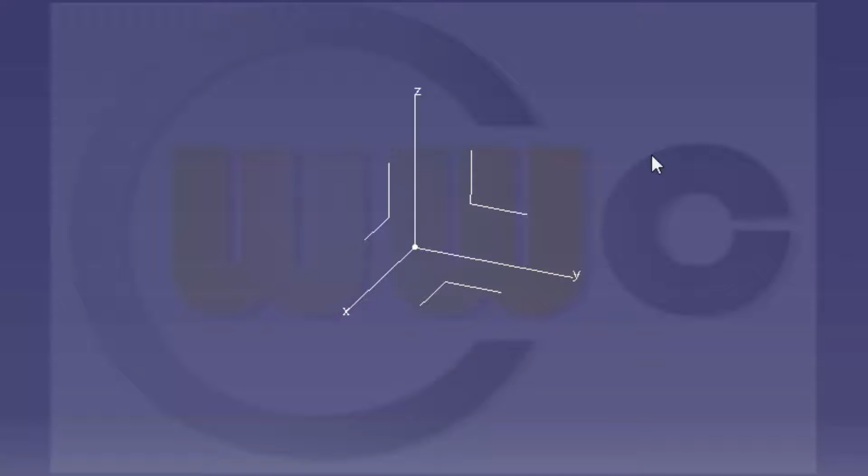Let's start first with some more geometrical sets. Call this one reference planes. Insert another one, call it sketches. And another one, call it surfaces. Okay, first start with the reference planes.

I need some planes which have an offset from this one. First 2.5. Activate it with a double click, then it stays active. This should be reference 10.

Another one from this one, this should be 110. Next one from here, this should be 10 again, and a last one with 17.5.

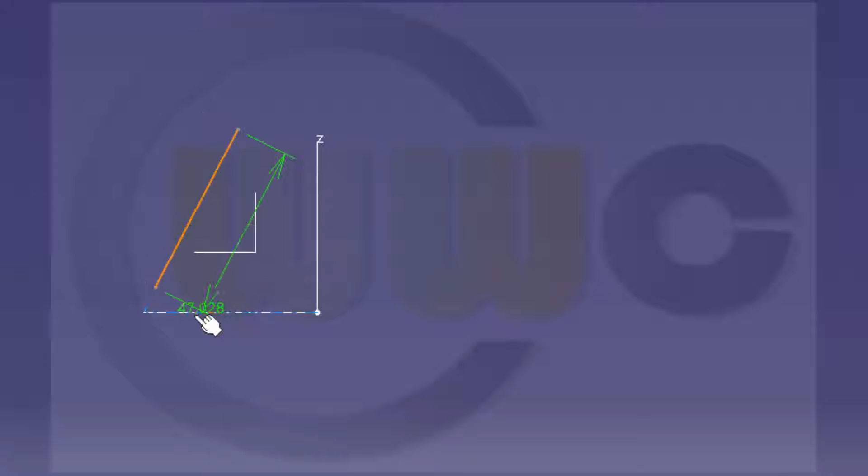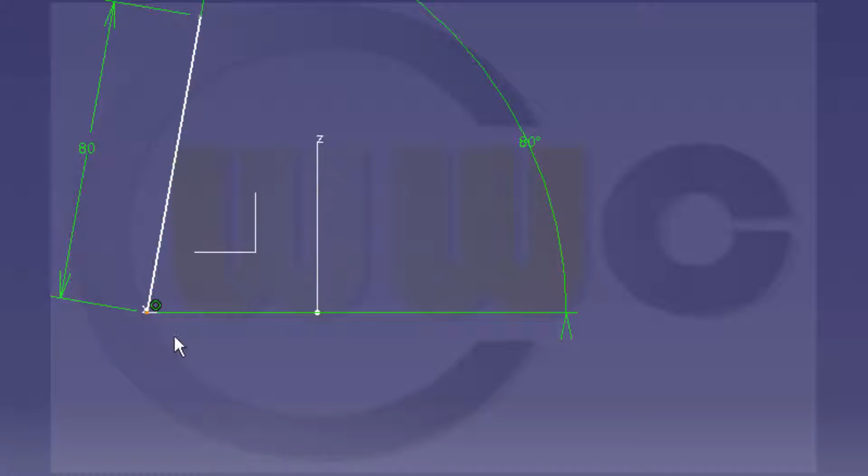There should be an angle, this should be 80. This should be coincident to that axis. This might be 80. And distance from that point to that axis should be 20. Okay.

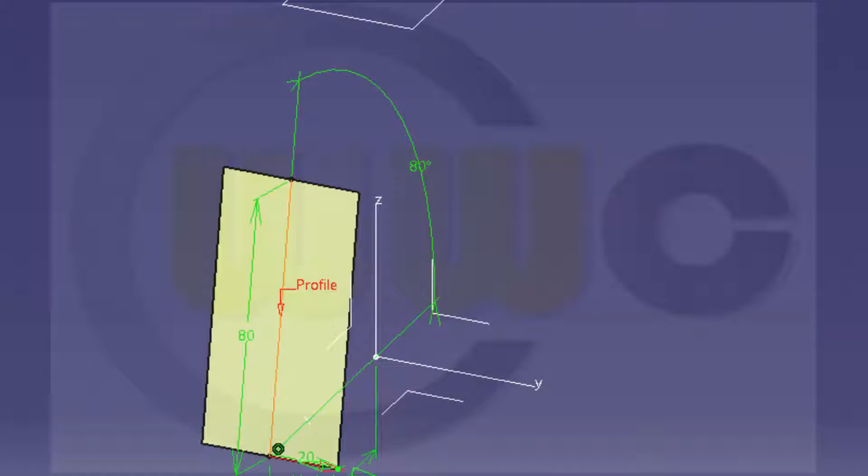Change the geometrical set and make an extrude with this line, make it mirrored, make it 100, then mirror it with that plane and confirm.

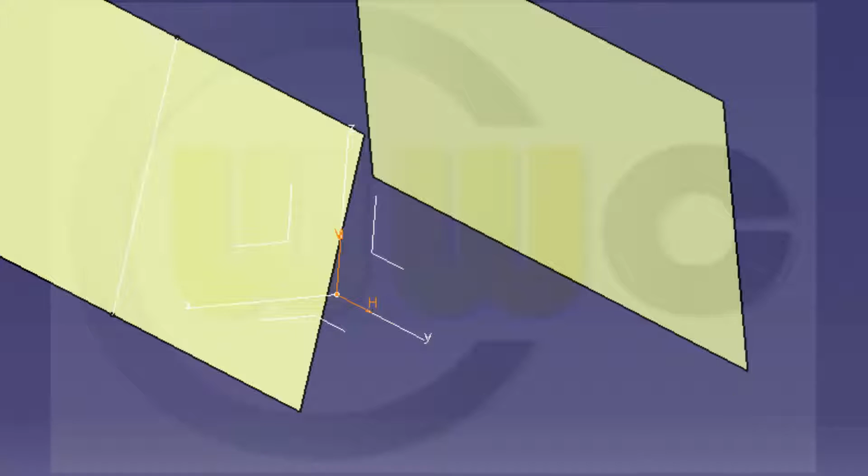Then I need another sketch on this plane. Okay. Hide. And this should be a circle. And that should be 90.

Or let's make an arc, 3-point arc. It should be something like this. Maybe hide this one. Okay. Radius should be 90.

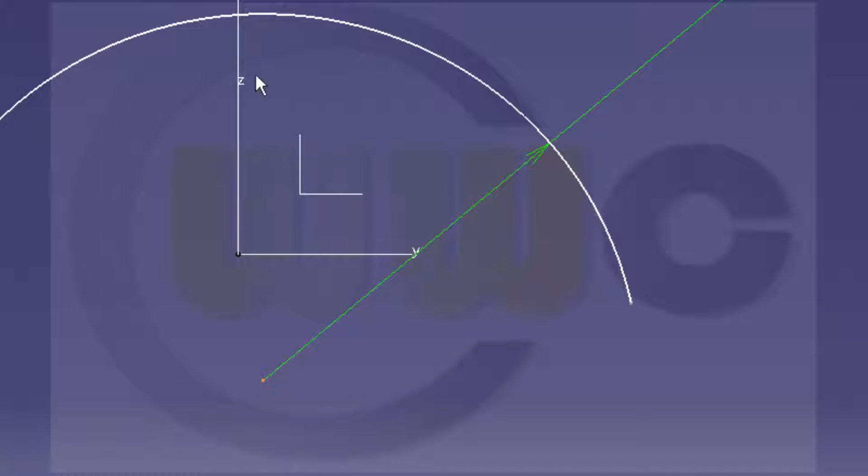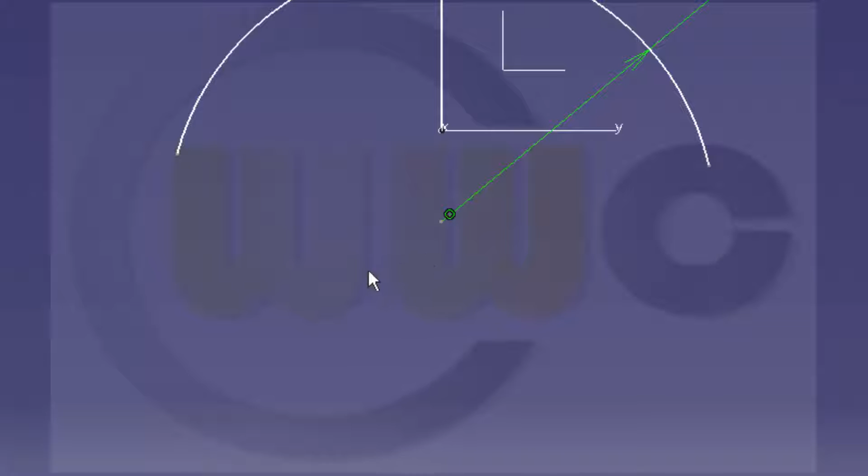Okay, that point should be on that axis, coincident. And maybe this one on that axis, coincident, and the same applies to these points.

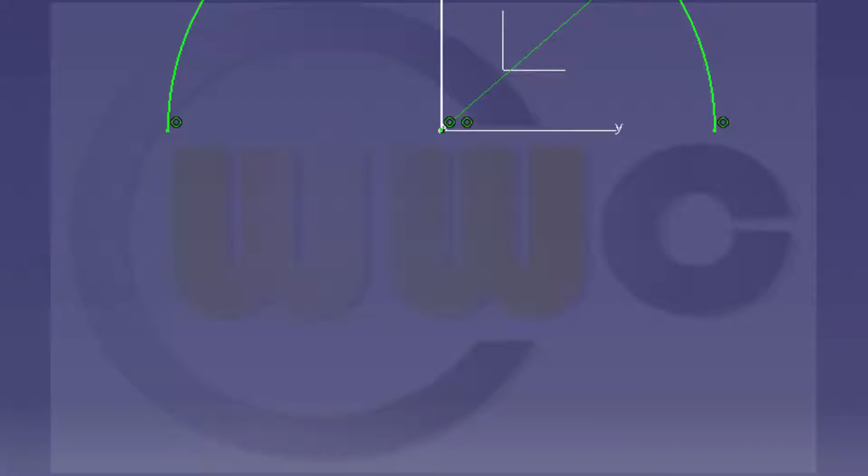Leave the sketch and make an extrusion, at least, yeah, 100 is okay. Fine. And I just noticed this should be a little bit more, let's say 90 or even 100. Okay.

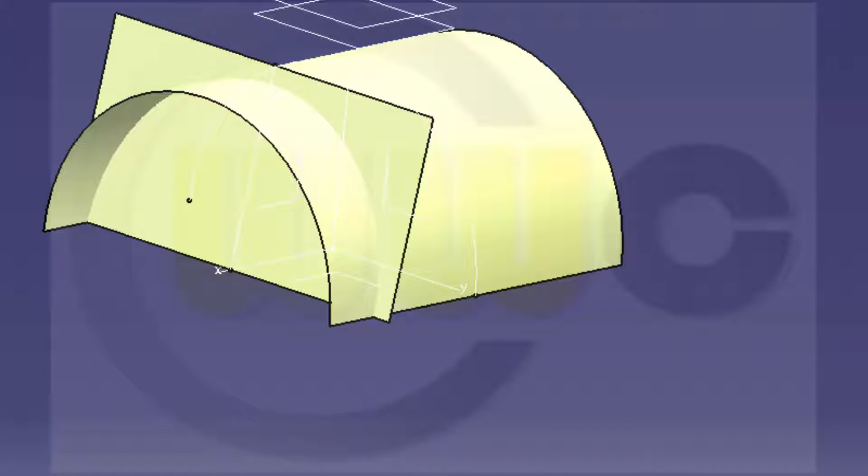This sketch should be in this geometrical set. That's okay. And I need another sketch, another circle.

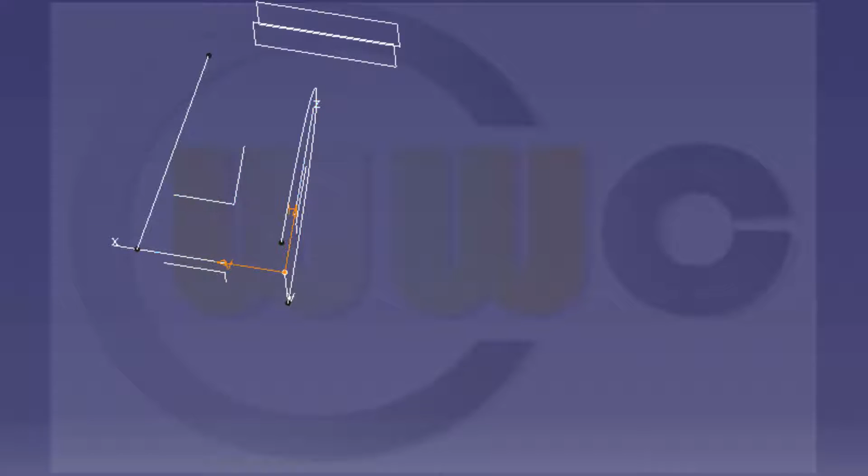Make this the working object. Hide this for the moment. And this should be right on that plane. Swap, reverse, okay, hide, and this is a circle, so I'll go for an arc again.

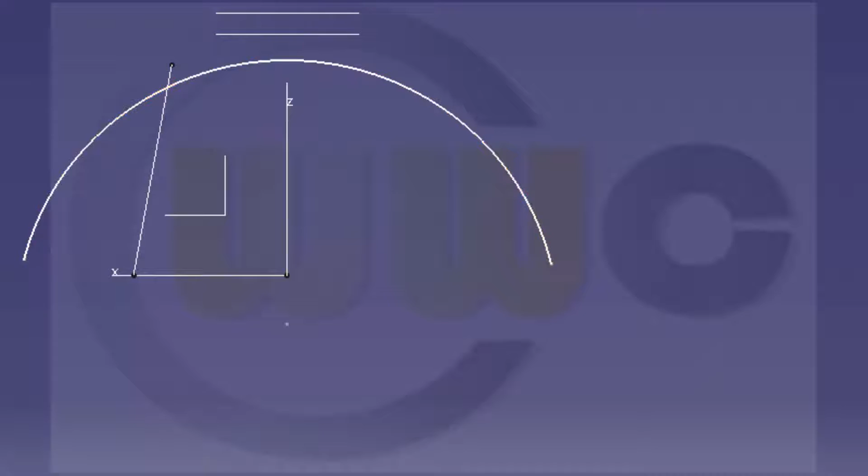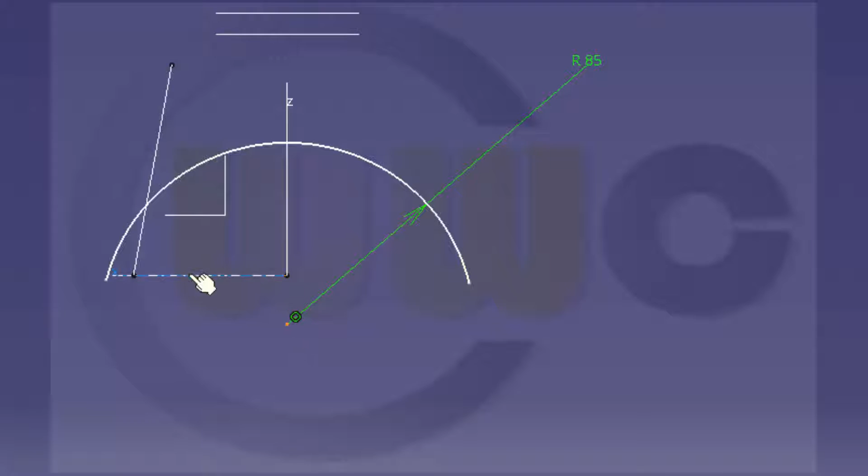1, 2, 3. Radius should be 85. This should be on that axis, and again coincident, and let's make their distance, let's say, yeah, 20 is okay,

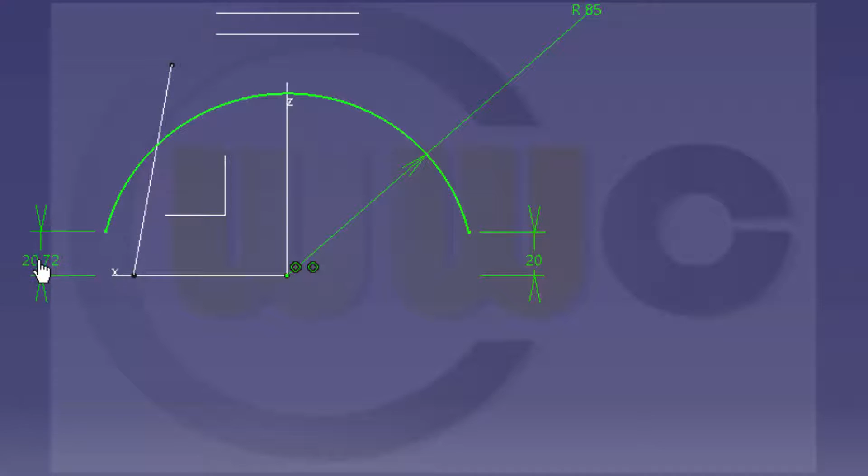and here as well, let's use a constraint, make another extrude, so show this.

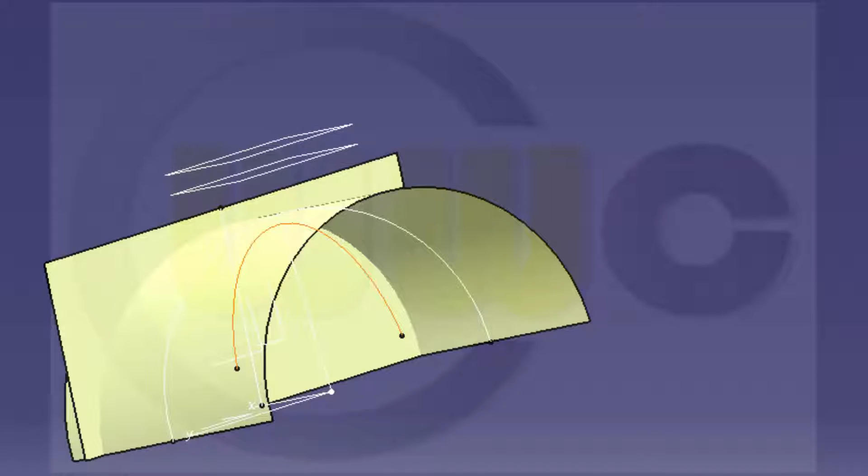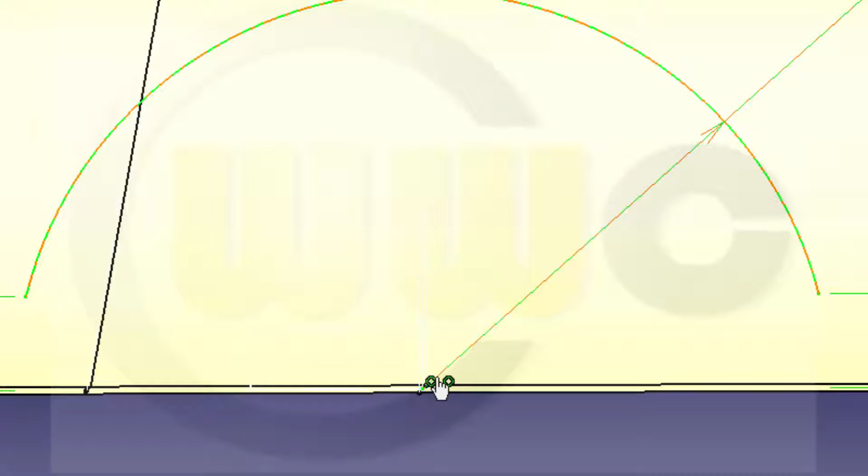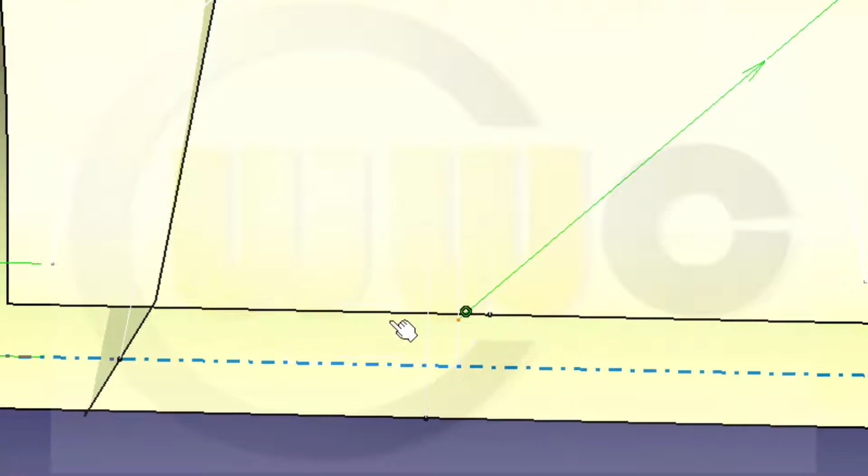But this should be at the same height, so this should go up, and the distance should be, where's my axis? Right here, and this should be 5.

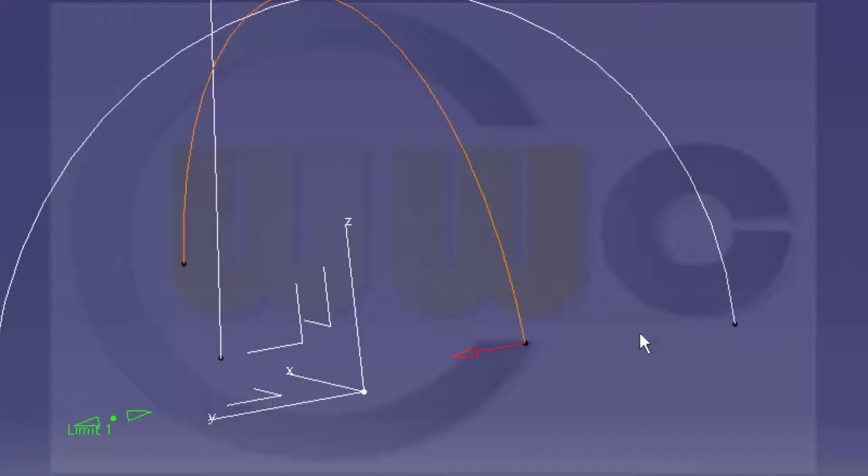And leave the sketch, make an extrude, and make it mirrored, and yeah, it should be okay. Show this. Show the symmetry as well.

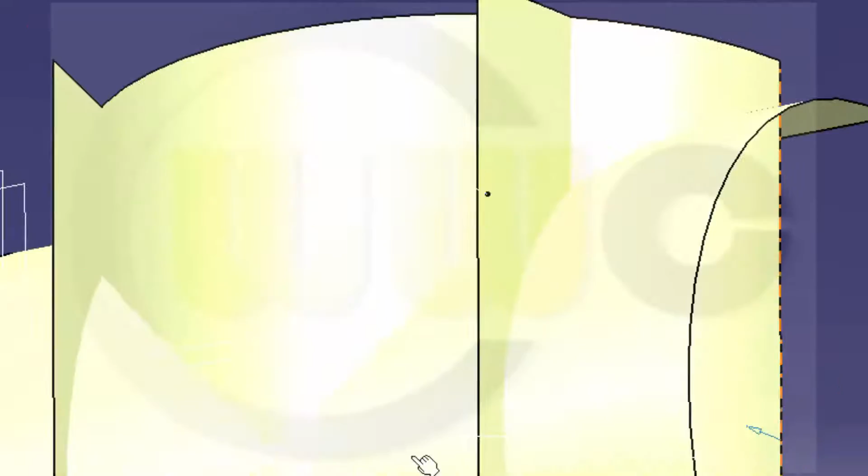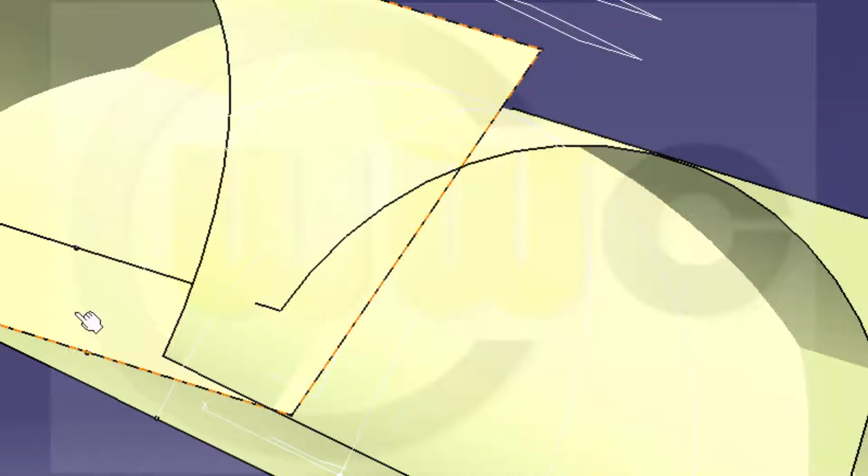And now let's trim this. So let's trim, where's my trim, and I want to trim first this one with, let me check this one.

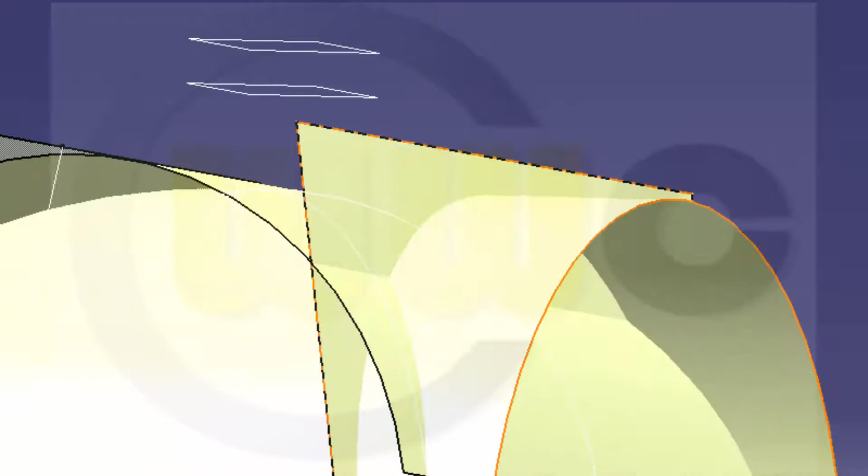Yes, and then with this one. Okay. Let's check it, that's okay. Trim again.

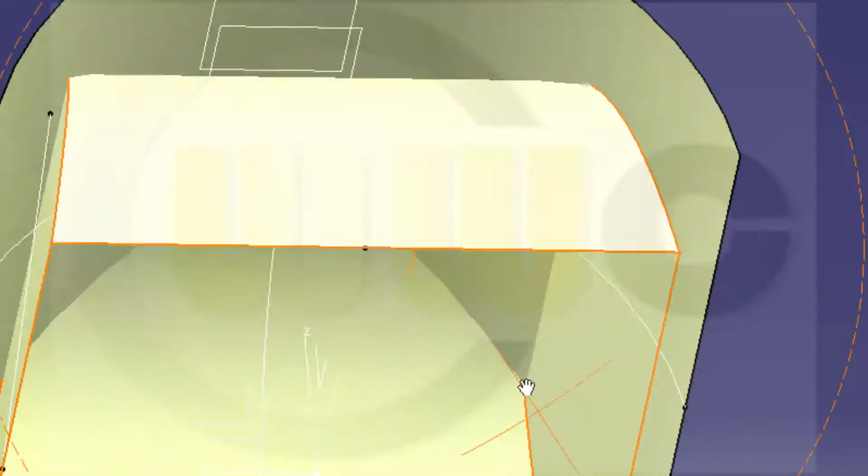Now the complete trim must be this with this. Okay, let's - I think that's it. And okay, yeah, nice.

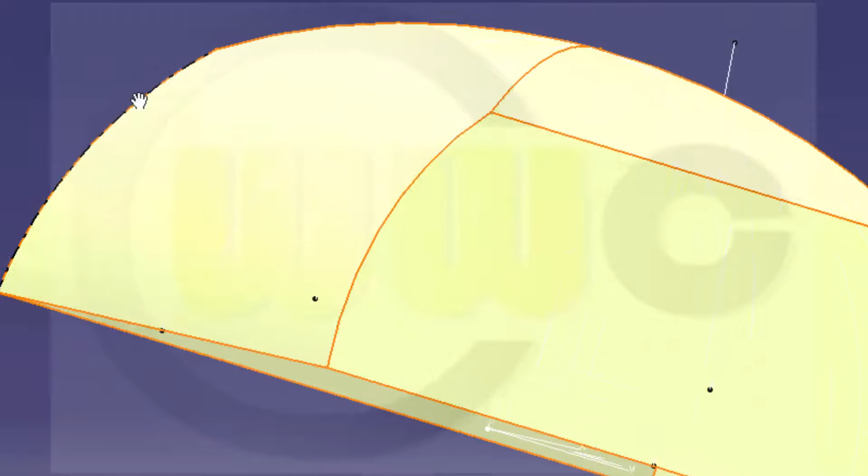So this should be one surface. Okay, let's insert another body and go to part design, and there you can close the surface.

I want to close this trim 2, that's okay. Confirm, and then you can hide this, and you got your solid. Okay, now give this a different name, call it, for example, base body.

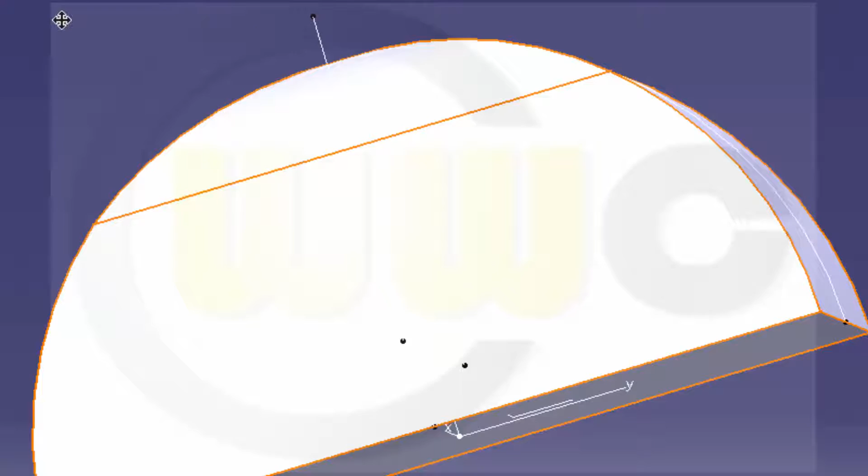Now another sketch on this plane. Turn it around, hide these elements as usual. Okay, now I need an ellipse.

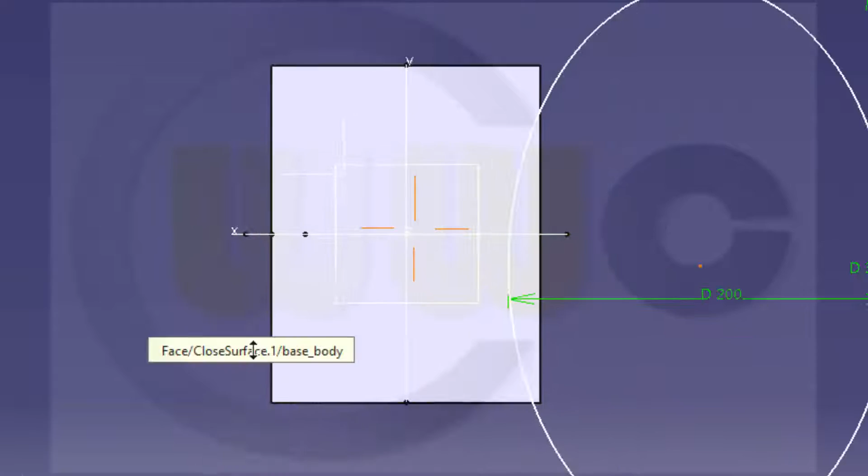Maybe like this. This should be 300, and the minor axis should be 200. This should be coincident to this axis and to that axis,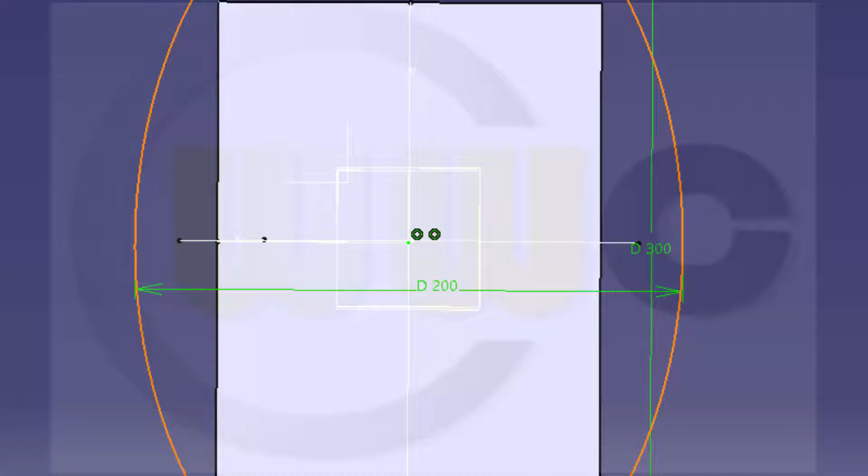and I can still turn it around so there's another constraint missing, and therefore select the ellipse, go to constraints defined in dialog box, and not this one, check the vertical one, yes, and okay, and it sets a constraint.

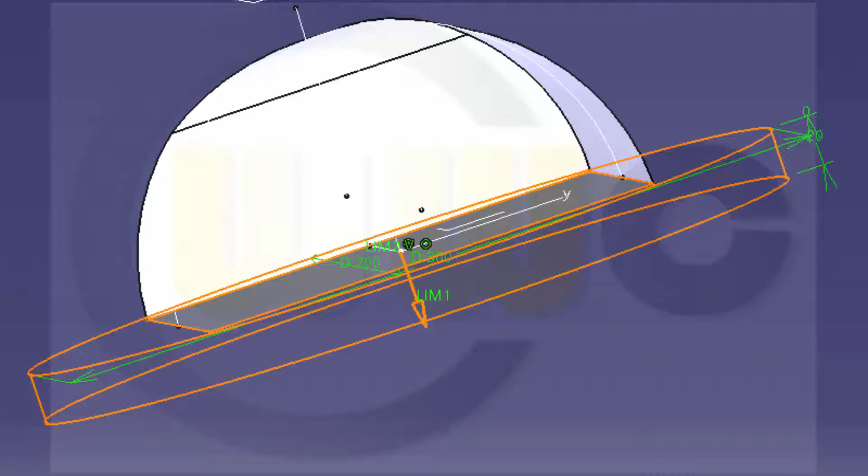Now leave the sketch, make an extrude, reverse the direction and make it 10 millimeters. Okay, now let's add some fillets.

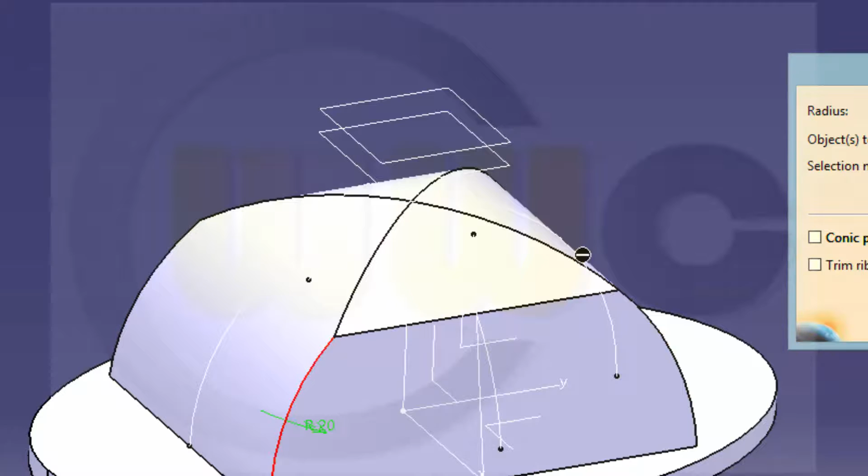And these should be 20 millimeters. First take this one, that one, that one, that one, this one, and the other ones.

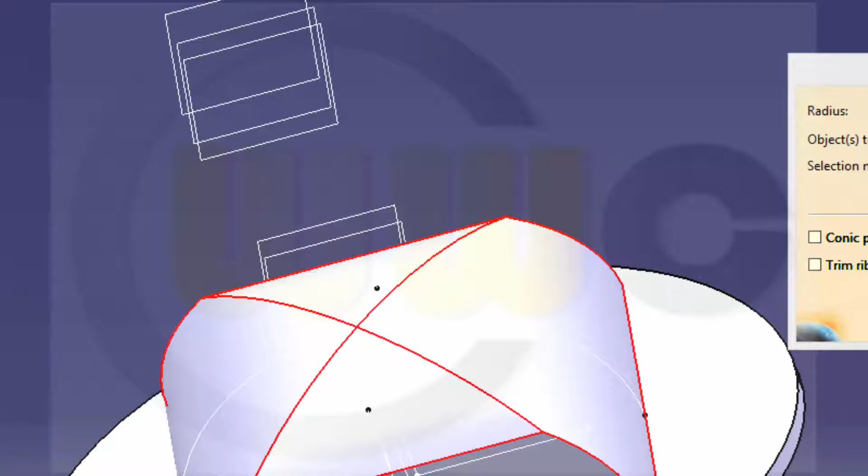Let's take, yeah, I got a face, I remove this, try to catch the edges. Check it again. Yes, close. Okay. Yes.

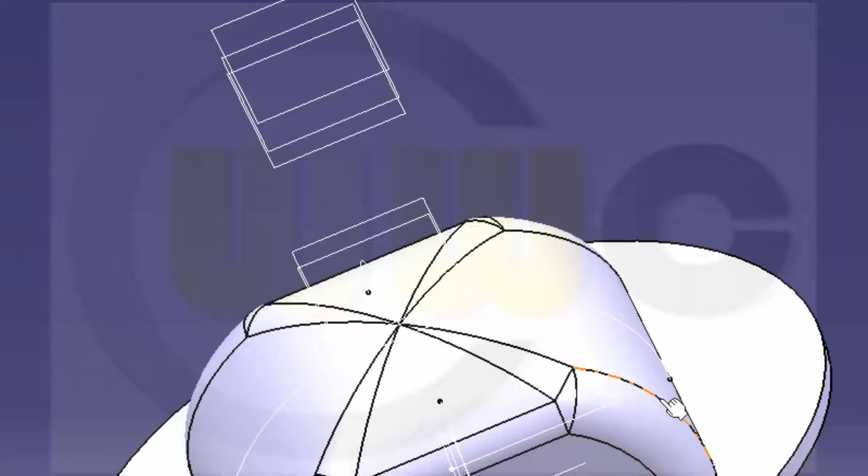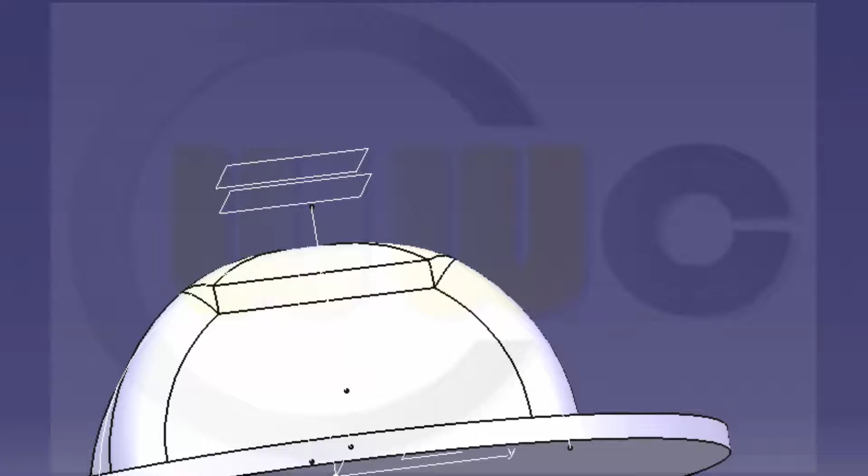Add another one, 3 millimeters right here. Okay. And now let's make a shell. Remove this face, and the rest should have a thickness of 10. Okay, nice, so my base body is done.

Now let's insert another body. Call it the upper body.

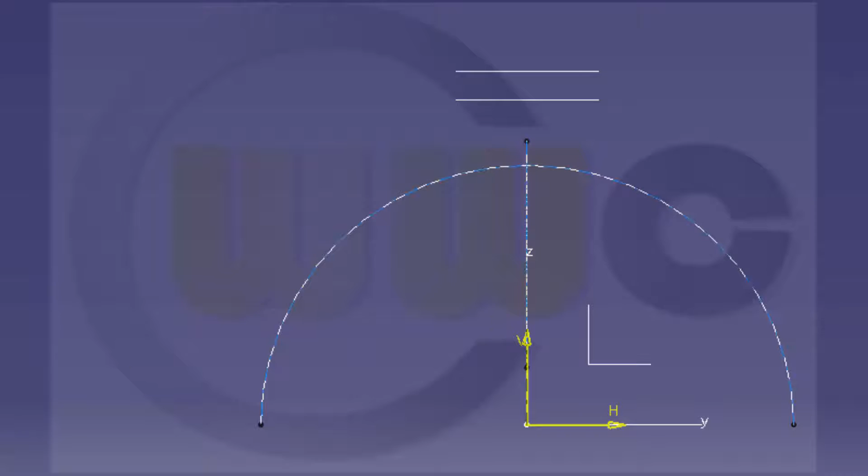Okay, I need a sketch on that plane. I could hide the body right here and the sketches as well. Hide these and make a sketch which looks something like this, for example.

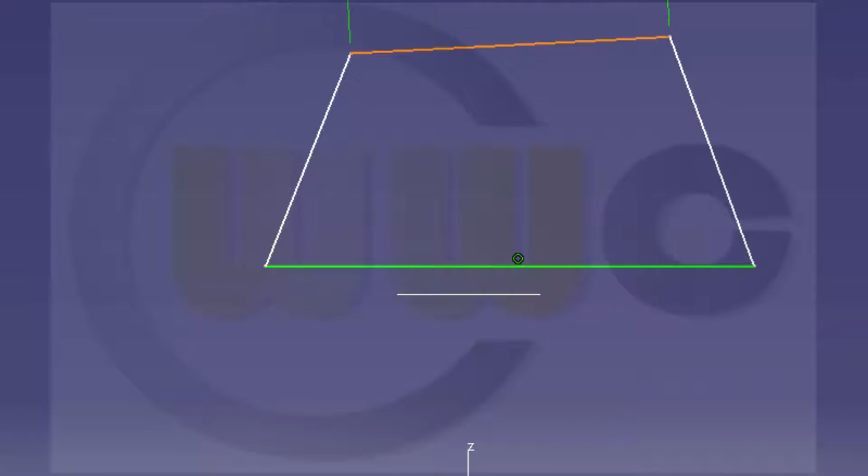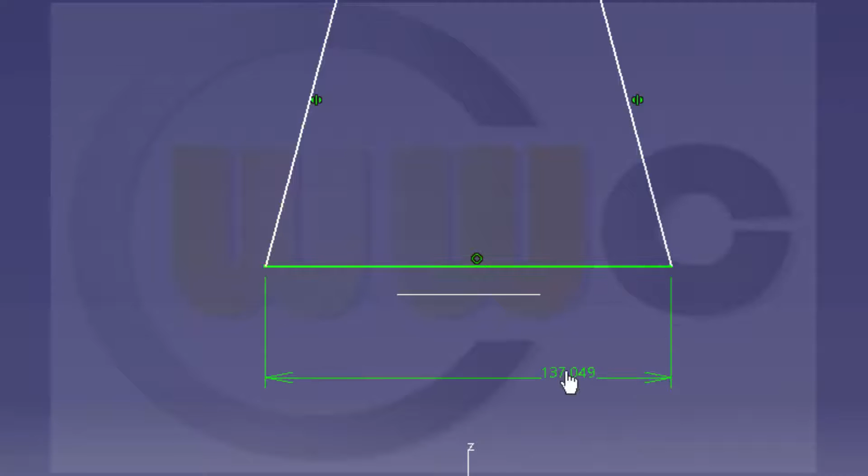Then make these coincident, that one coincident. These two should be symmetric to... sorry, made one click too fast. Should be symmetrical to this one, and this should be 110, and this should be 80.

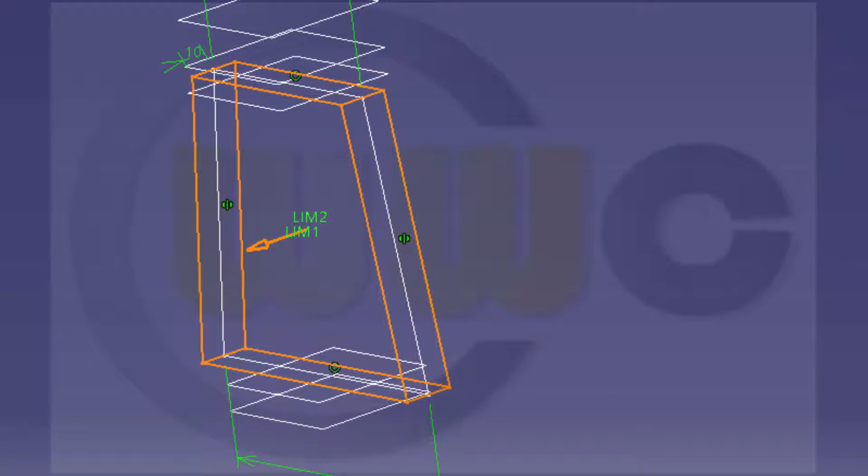Okay, now let's make a pad, make it symmetric, make it 37, and make it a thick pad. Thick, and the thickness should be 10,

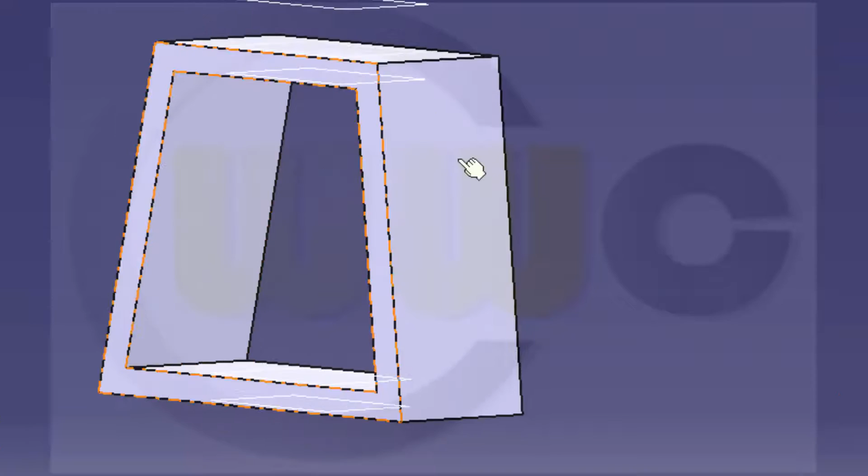like this. Okay, now make some fillets. 10, 1, 2, 3, and 4.

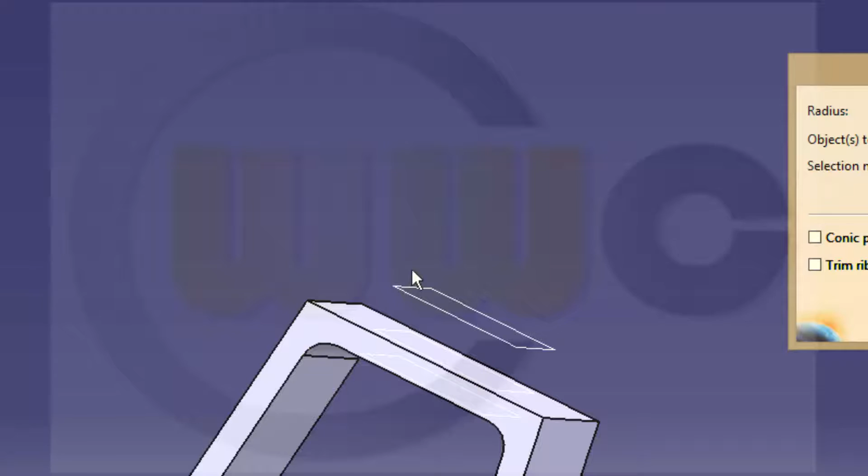Make some more fillets. 20 radius. 1, 2, 3, 4.

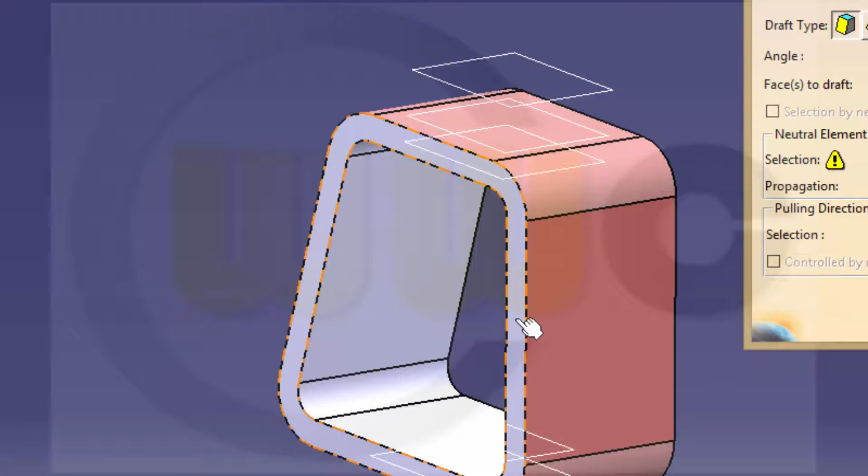Now let's make 2 drafts. 10 degrees. All the faces should be drafted. Neutral element is this face. And go to more. Define a parting element, and this should be that plane.

Same on the other side. Another draft. 10, it's okay. Draft these faces. Neutral element is that face. More, define the parting element, same as before is this one. And oh, come on, seems the direction was wrong. It is, turn it around, and okay.

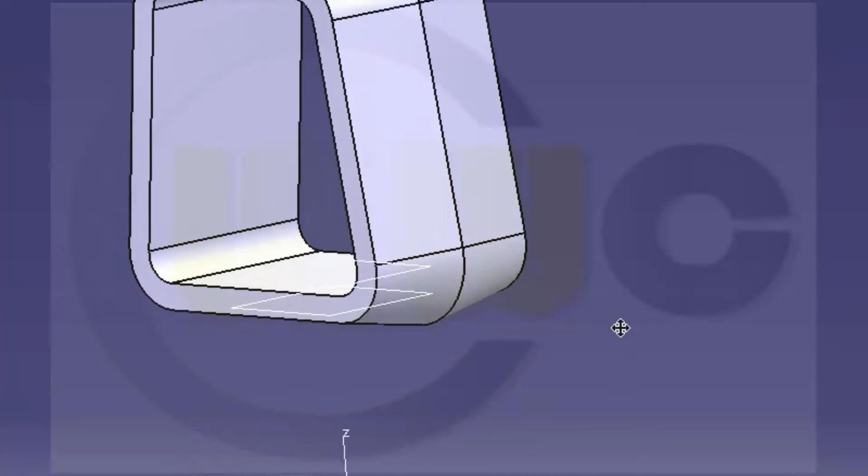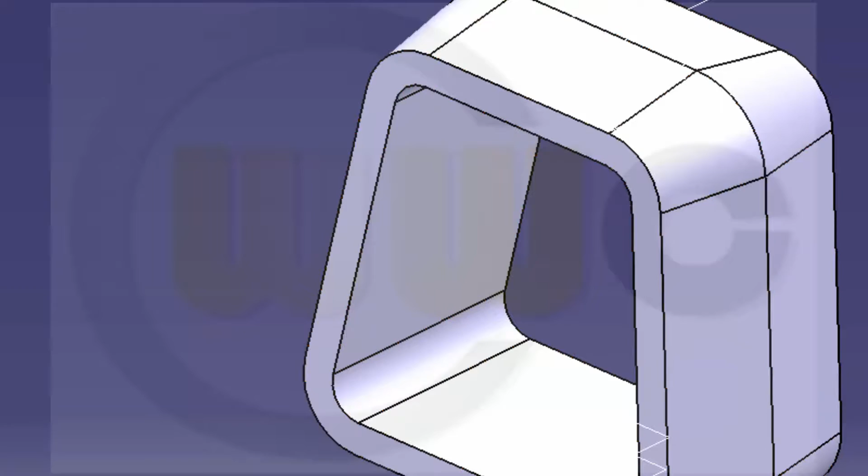Let's add another body. Call it shaft, for example, and let's show the base body. Okay,

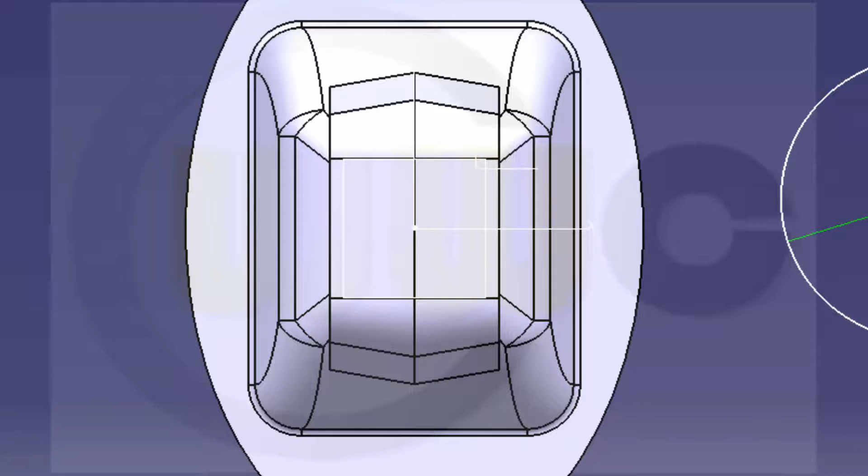make a sketch on that plane. Hide these elements. Make a circle. Diameter is 60. Center point is on that axis and on the other one as well.

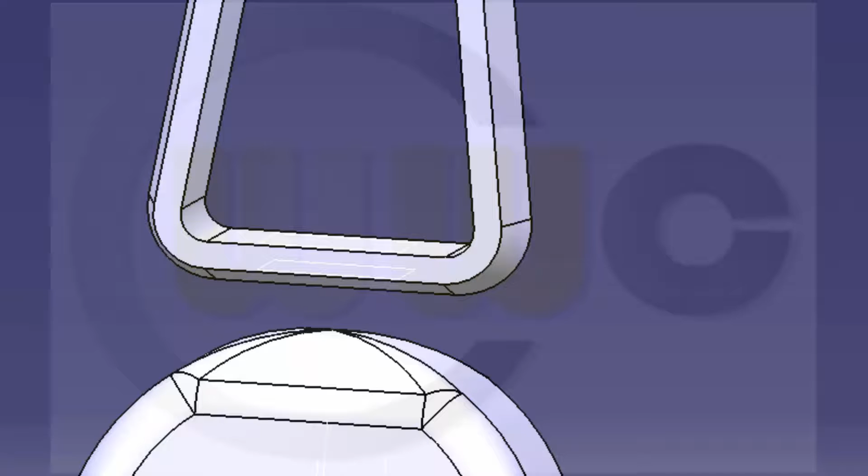Okay, leave the sketch, make an extrude, make a pad, reverse the direction, make it up to surface, and the surface should be this trim. See, this one. Okay, and okay.

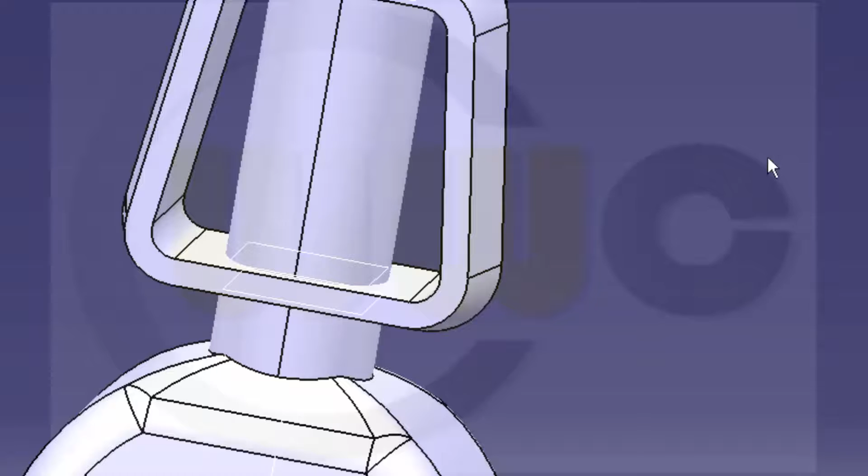Now I can trim the body with a union trim. I want to trim this body with this body. And I want to remove this face, and okay.

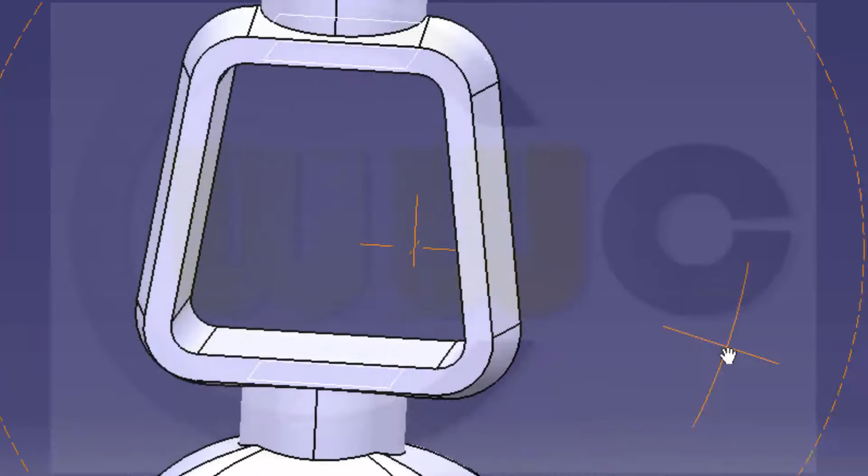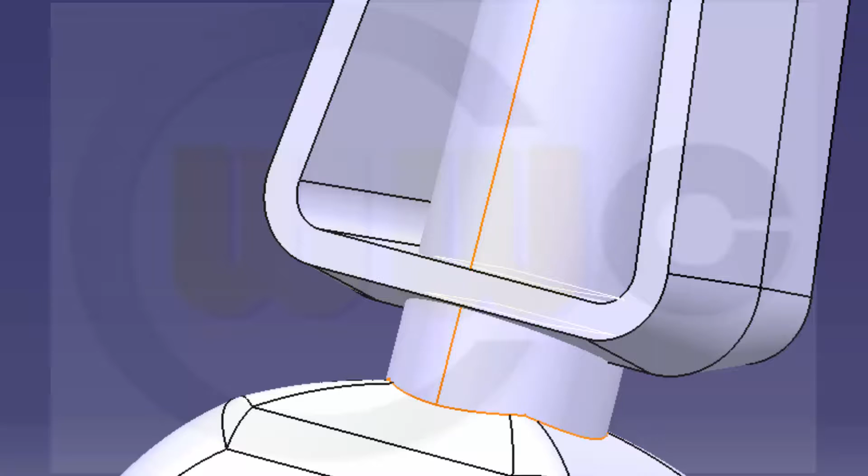I think I will do something different right here. So that's the shaft. Maybe let's do the shaft defining work object. Go to the pad and make it up to plane. Make it up to this plane. Okay.

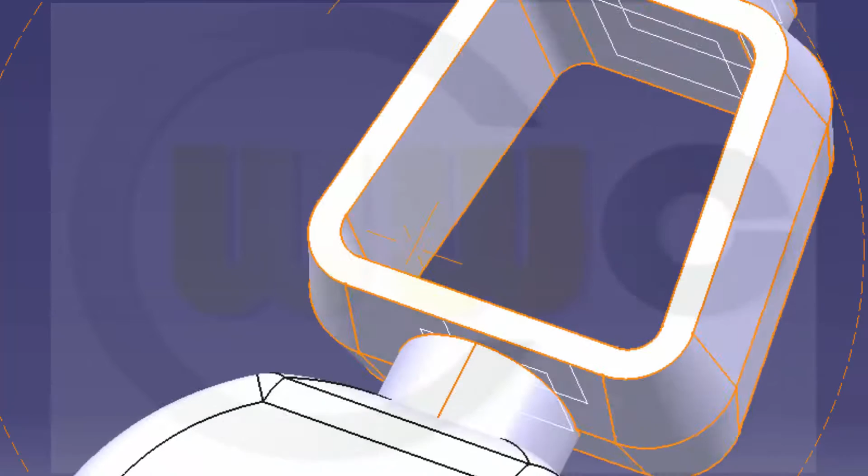And now the trim still the same, so let's define this. Yeah, that's okay. And now I want to trim this body with the base body. They will be united in this way, so I want to trim this one, the upper body, here, with the base body. And I want to remove these faces. Yes. Okay.

This looks okay. And

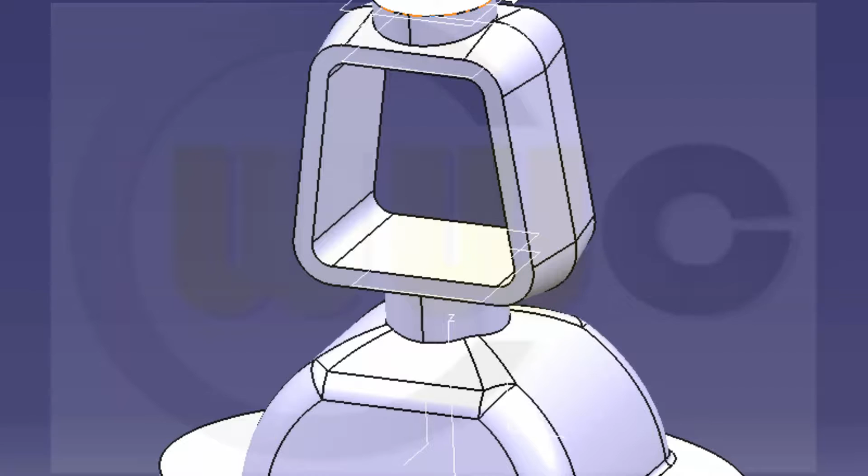now I could make a hole. Let's check. I want to make a hole on this face. Diameter should be 40, and it should go up to, let's say, plane, same plane as here. So this one. Okay.

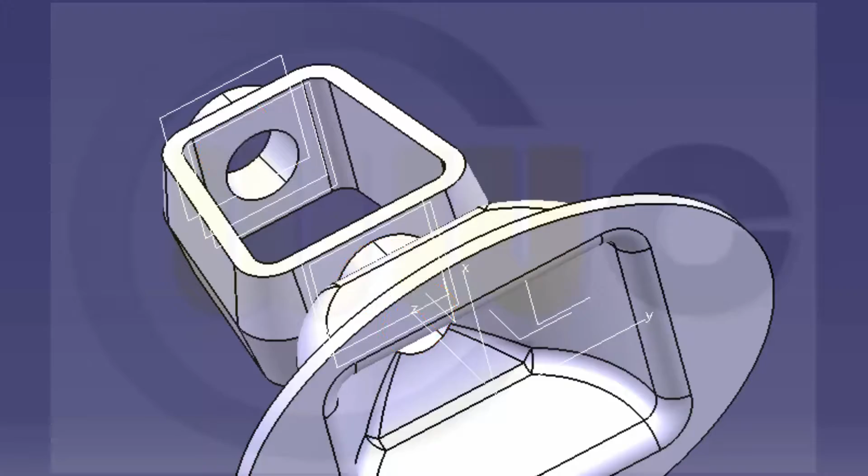Let's take a look. Yes, this looks nice. And I need another body. Insert body. Call this Stiffener, for example.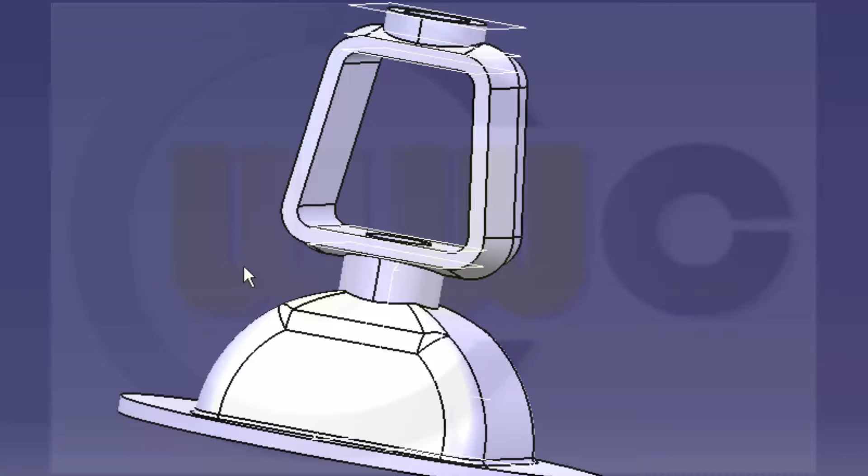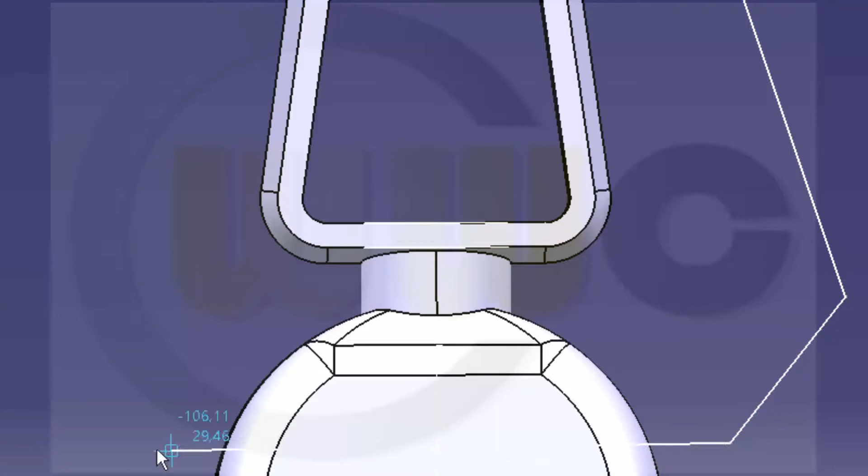Yep. And this should be sketch. The plane. Hide. And this could look like this, for example.

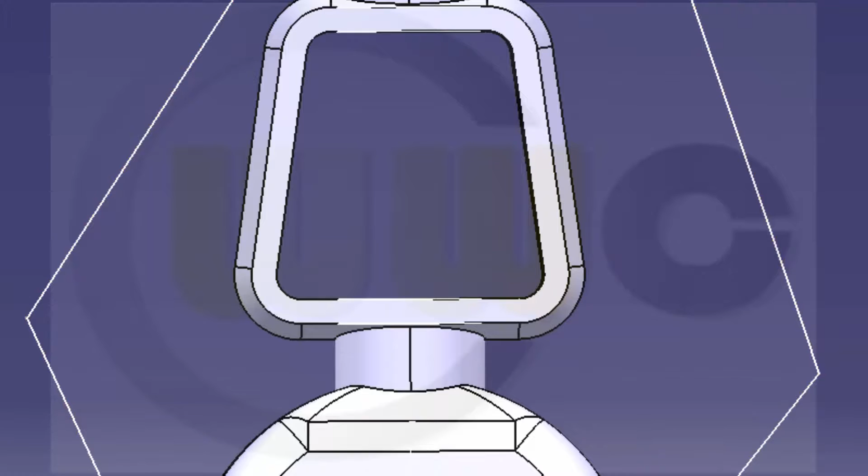Okay, give it some constraints. This should be coincident. There should be a distance. This should be 17.5.

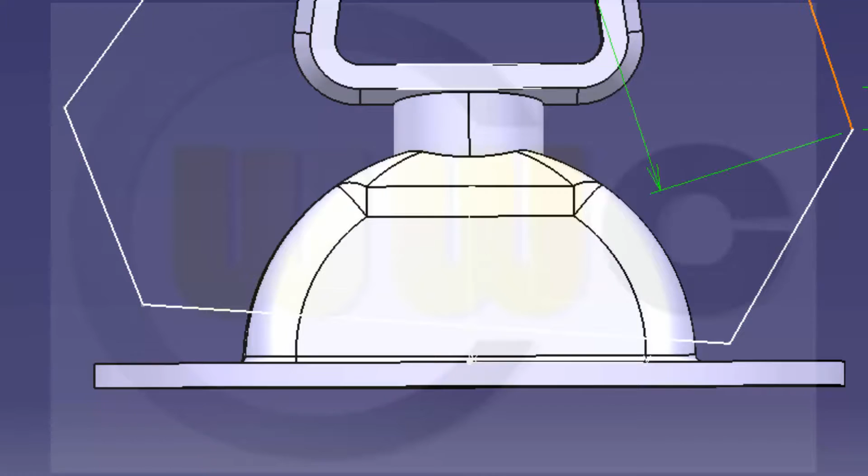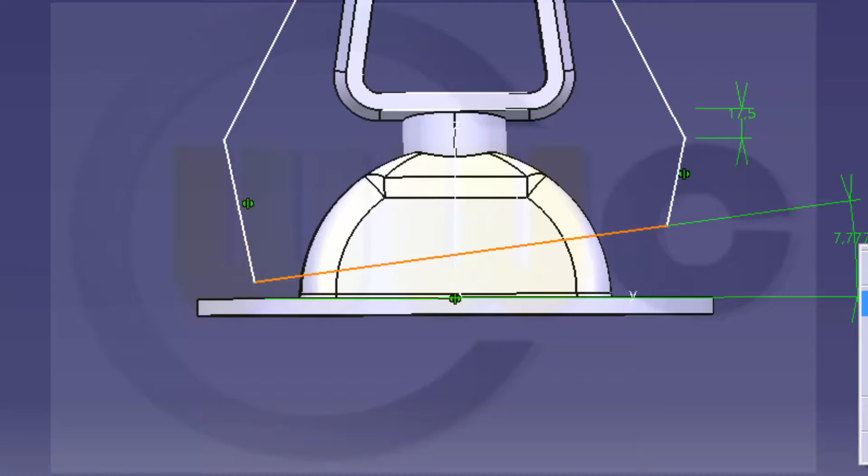These should be symmetric to this axis, and these two should be symmetric as well to the same axis, this one. There might be a distance. Let's say 20.

Okay. Then I need this edge for an angle. This is 5. This distance should be 128, and there is an angle, which is 55. This is full constraint.

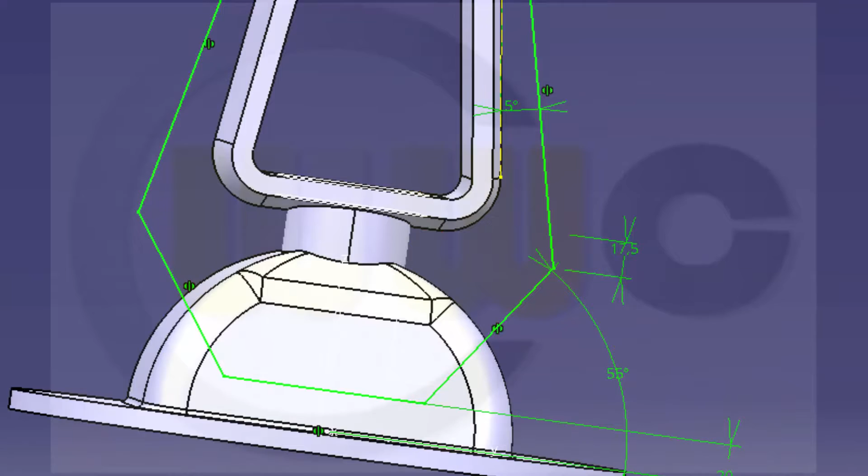Yes. Leave the sketch, make an extrude, make it symmetric, mirrored extend. Length should be 8. Okay.

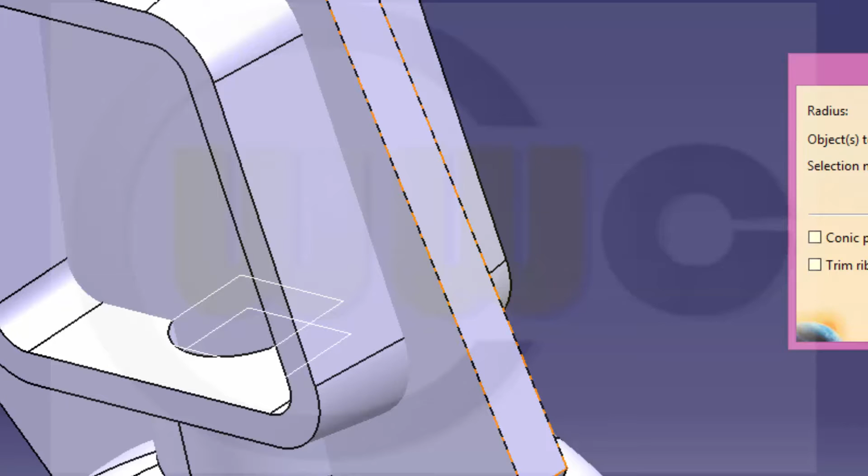Now let's make some fillets. 30 millimeter. This one, that one, and this one.

Okay. Now let's make a tri-tangent fillet. This face with that face, and this face should be removed.

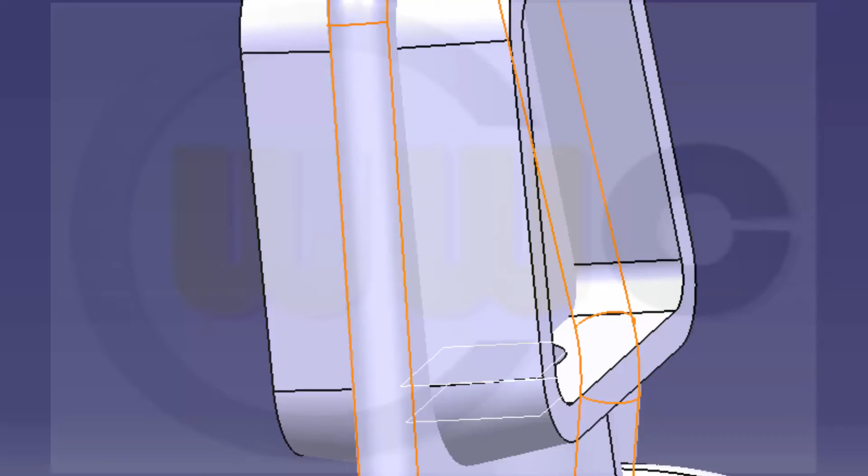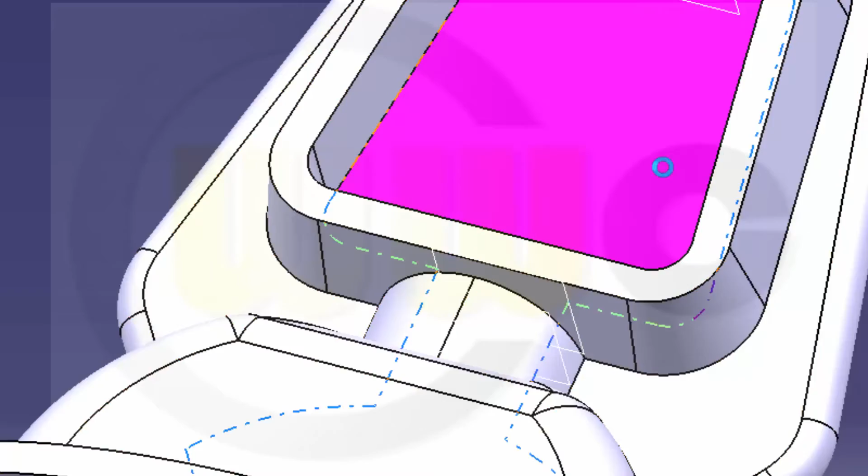Okay, looks very nice. What I need now is another remove face, and I want to trim stiffener with the base body, and I want to remove this face, that face, and of course these as well. Let's take a look.

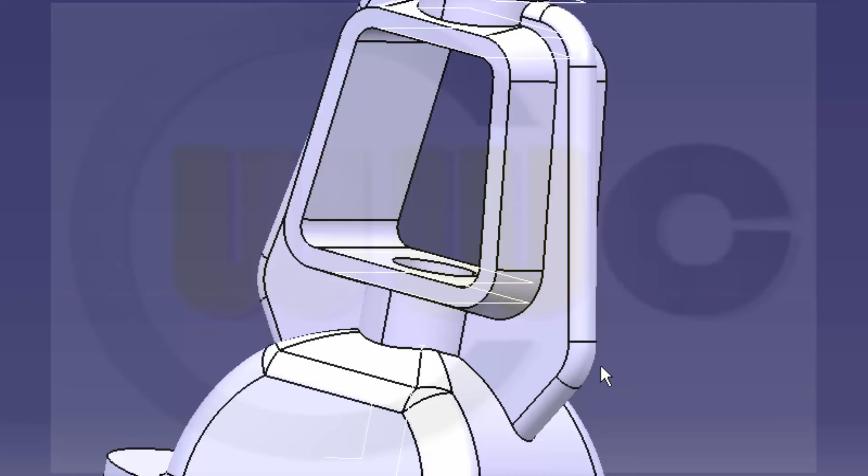Looks pretty good. Yes, I'm almost done. There's just one fillet missing. Or yeah, 2 fillets. 3 millimeter.

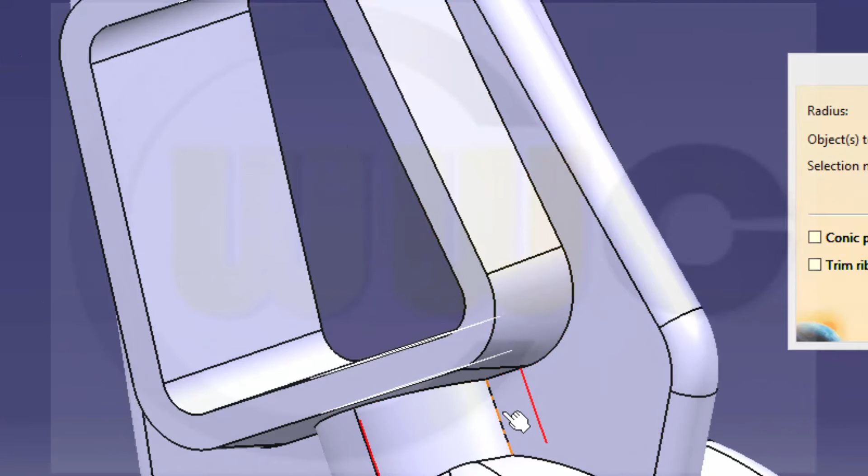First this edge, that one, this one, that one. Okay, and then you can have a fillet which is continuing in tangency like this.

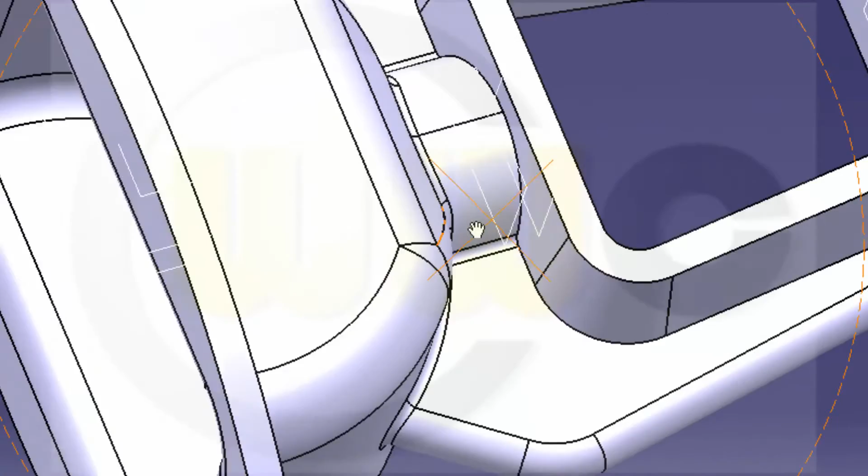So I think I'm done. Hope you enjoyed this video as well. See you in the next one. Bye bye.